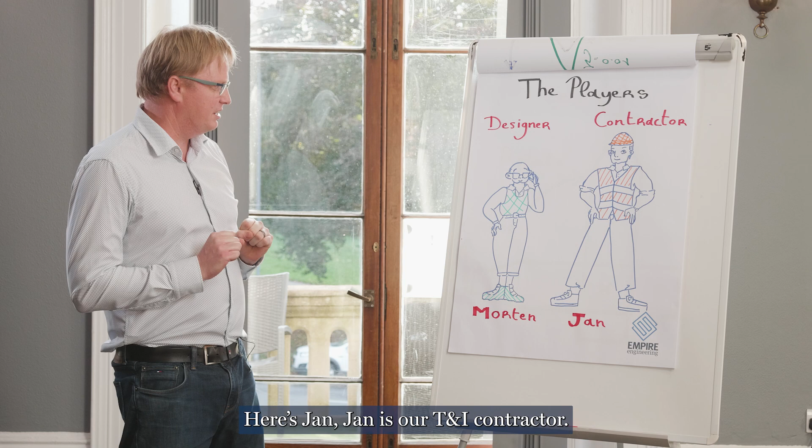I want to start out by talking about the players. Here we've got the designer. This is Morten. Morten spent the last year obsessing over his foundation design, eking out every piece of steel, making them the most optimized structures he possibly can. Here's Jan. Jan is our T&I contractor. He's recently been appointed to install Morten's foundations.

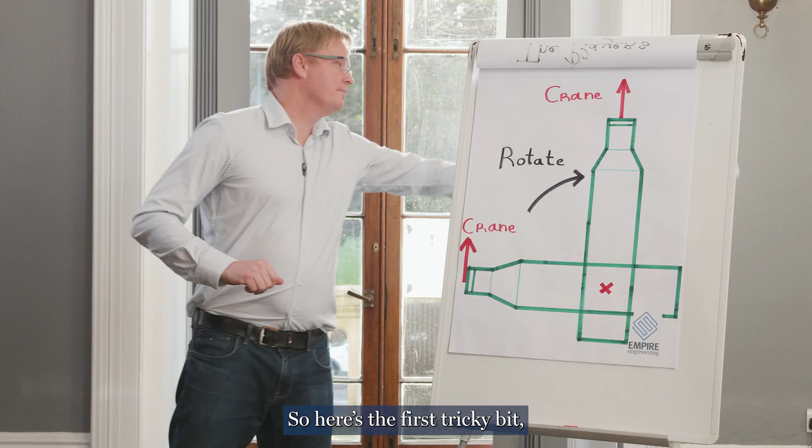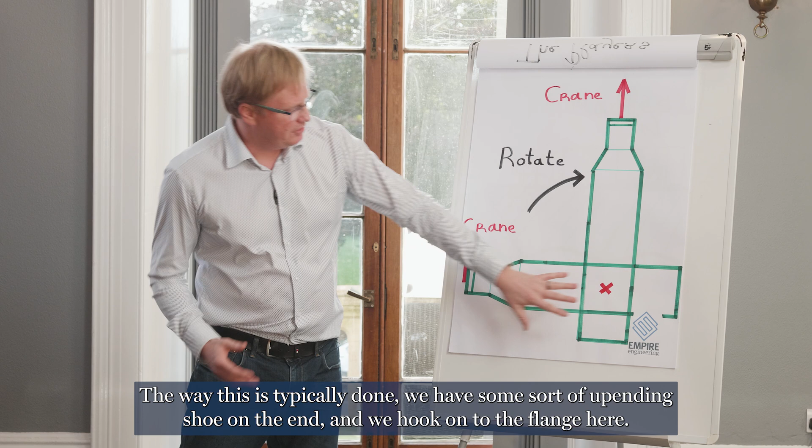So here's the first tricky bit, monopile upending. So the monopile starts out horizontally on the vessel, and we need to get it into the upright position before driving. The way this is typically done is we have some sort of upending shoe on the end, and we hook onto the flange here. Now, I mentioned Morten, the designer.

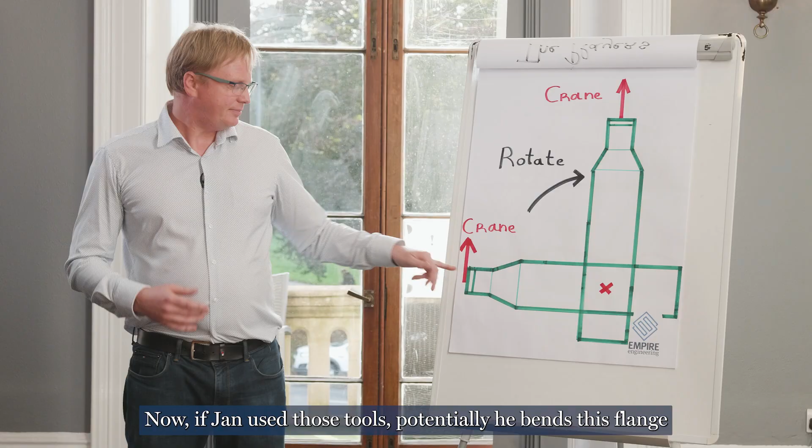Morten has spent the whole year finessing this flange design, making sure it's perfect. He's asked people to machine this flange perfectly flat after it's been welded on, so it's in pristine condition. Jan, however, wants to use the tools he used on the past project, because they're available to him. Now, if Jan uses those tools, potentially he bends this flange and it doesn't work for Morten anymore. So you have this kind of conflict over what the requirements are.

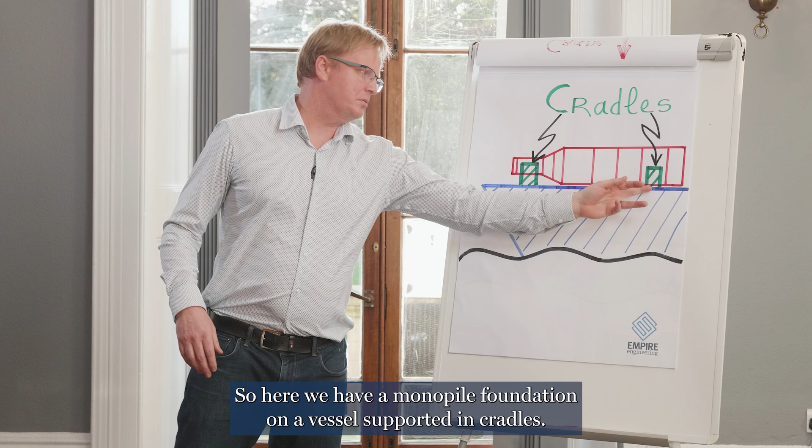Next tricky bit I want to talk about is monopile transportation. So here we have our monopile foundation on a vessel supported in cradles. Now, Morten, our designer, he's designed each of these cans so that they'll last the full 25, 35-year design life of the project. He doesn't want to have to change the design of these cans where the cradles are for this one-off instance of when you're transporting.

Jan, however, wants to use the cradles he probably had on his last project, and he wants to keep them as small and as light as possible. So again, we have this contrasting set of requirements from the two guys.

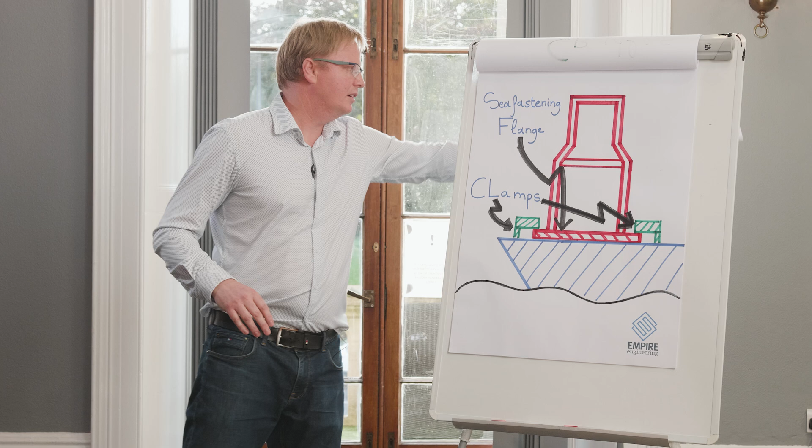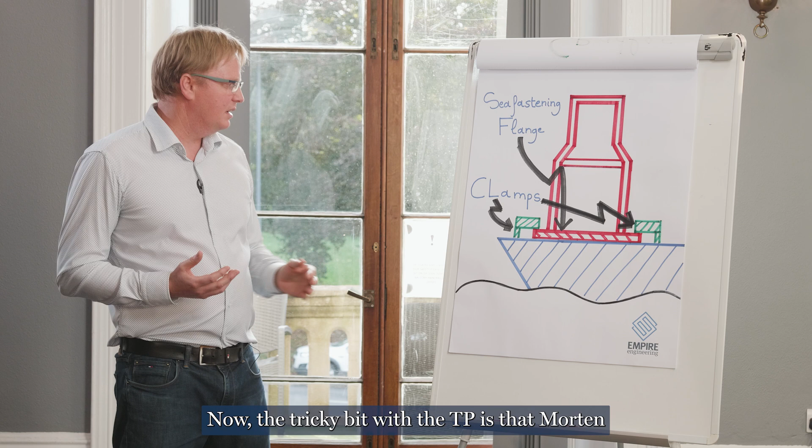The third tricky bit I want to talk about is around the TP transportation. Now, this is quite similar to the monopile transportation. Obviously, we've got a TP upended here sitting on your vessel. Now, the tricky bit with the TP is that Morten doesn't really care about the skirt very much. Once it's in operation, the skirt, all it's doing is hanging a boat landing. It's probably supported by some grout. It's not having to work very hard.

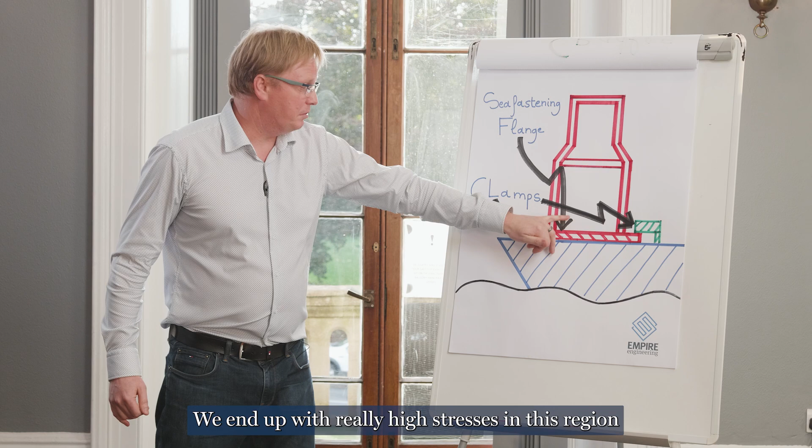But in transport, when you've got lots of mass up here in this vessel, which Jan wants to sail in as broad weather windows and rough conditions as possible to get the project done quickly, we end up with really high stresses in this region because Morten's designed it as light as possible, but Jan has a slightly different purpose for it. So that creates this conflict.

Now, I've talked a lot about Morten and Jan. They have very different motivations around the project. But the thing is, they do have things in common. They both like beer, they both like bicycles. And our recommendation is that very early on in your project, you want to get Morten and Jan together, have a beer, talk about bikes, and share ideas.